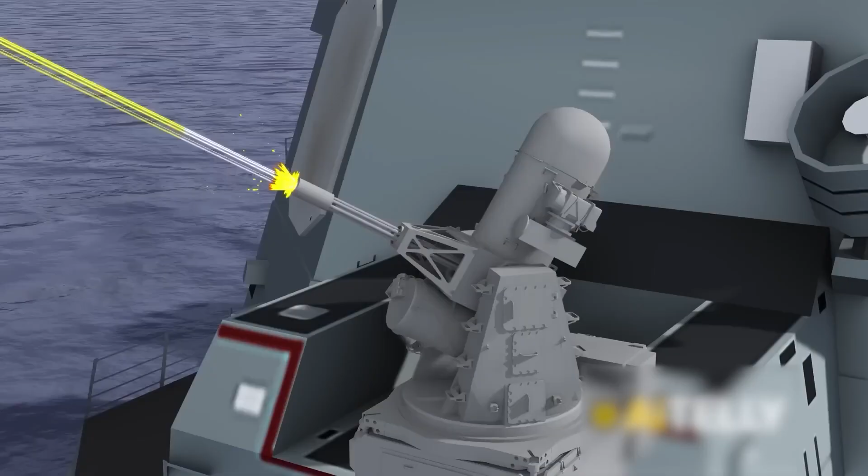The United States has outfitted its ships with the most lethal armaments in the world. What are these weapons' capabilities? Are they strong enough to defend these aircraft carriers against the expanding aerial threats? Watch us examine some of the most lethal U.S. Navy weapons.

The U.S. Navy's surface fleet consists of around 70 Arleigh Burke-class destroyers and 22 Ticonderoga-class cruisers, both equipped with the Aegis combat system. This modern system uses sophisticated radar and missile technologies to provide outstanding air defense, anti-submarine warfare, and ballistic missile defense. Furthermore, littoral combat ships provide flexibility and speed, particularly in coastal zones.

Another major aspect of the U.S. Navy is its submarine fleet, which comprises both fast attack and ballistic missile submarines. The Virginia-class SSNs are intended for stealth, reconnaissance, and strike capabilities, while the Ohio-class SSBNs play an important part in the U.S. nuclear deterrence policy.

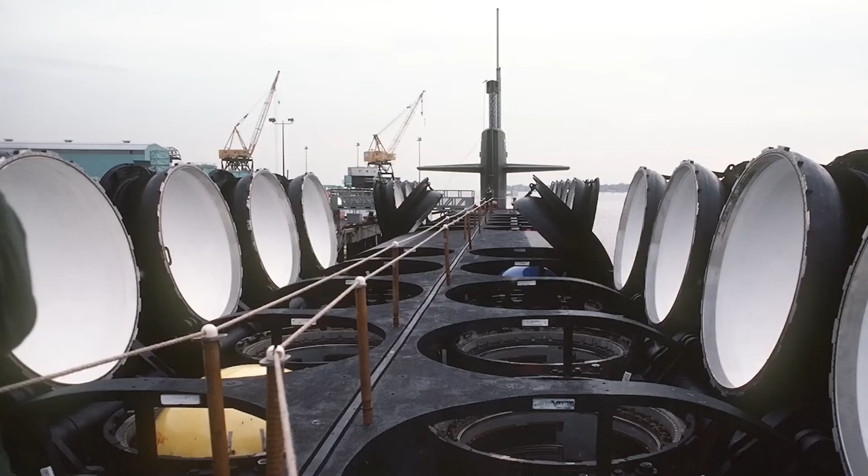Recently, modern battleships have faced major challenges from new technologies, such as drones and other stealth unmanned aircraft. On October 4, the USS Gerald R. Ford, the newest U.S. aircraft carrier, set sail for its first deployment amidst rising tensions in the Pacific and doubt about the future role of such massive ships in battle.

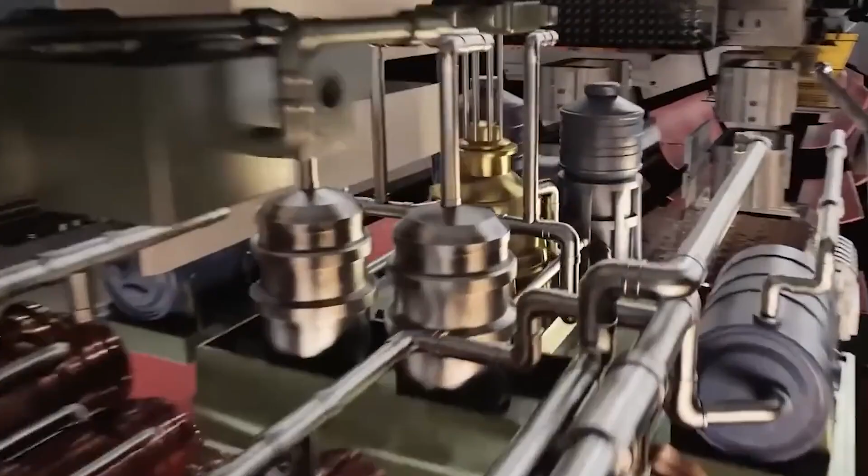Standing over 9 floors tall, the ship weighs 97,000 tons, 32,000 tons more than the heaviest battleships from WWII. The Ford is amazing in size. However, it is also fast, powered by modern A1B nuclear reactors that generate approximately 300 megawatts of power, making it nearly 3 times more powerful than contemporary supercarriers.

Despite their power, new Chinese anti-ship missiles capable of speeds greater than Mach 5 represent a huge threat to the Ford and the entire Pacific Navy fleet. These rockets might kill even the most modern ships. To combat these new threats, the Navy is using sophisticated long-range weaponry such as universal ship installations, railguns, and lasers, which may revolutionize future warfare.

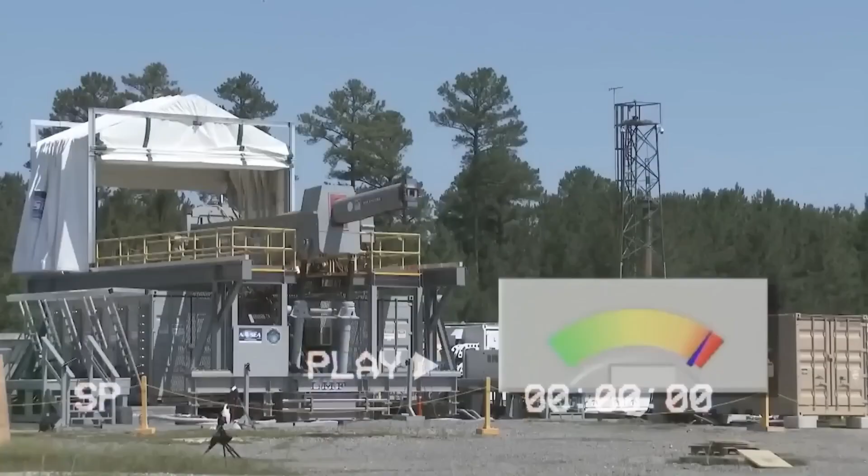Let's examine some of the technology that could safeguard these costly and crucial ships from aerial threats. Let's start with a unique firearm, the OTO Melara 76. This 76mm gun, also known as the OTO Melara 76/62 gun mount, is a naval autocannon manufactured by Italian manufacturer OTO Melara.

This gun is tiny enough to fit on a smaller vessel. It has a high firing rate and can use a variety of ammunition, making it ideal for close-range defense against missiles, aircraft, surface targets, and ground support. The ammunition comprises armor-piercing, incendiary, and guided rounds intended to hit moving anti-ship missiles.

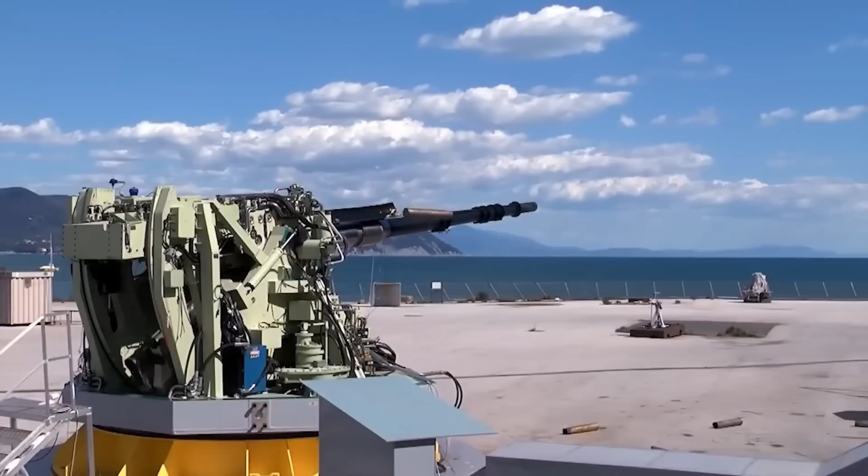It can also be concealed in a stealthy dome. The OTO Melara 76 gun's capacity to execute many duties such as short-range anti-missile defense, anti-aircraft operations, and ground support is one of its most notable attributes. The gun's rapid rate of fire, paired with a wide range of available ammunition, makes it more effective in a variety of combat circumstances. The cooling system of this gun uses seawater, while fresh water is used for flushing.

The gun's electrical power supply consists of a 440-voltage, 3-phase, 60 Hz main circuit and a 115 voltage, 1-phase, 400 Hz servo and synchro network. This electrical arrangement ensures that the gun functions properly under a variety of scenarios.

The OTO Melara 76mm cannon comes in a variety of configurations, each tailored to specific operating needs. The original compact model had a circular dome with a firing rate of 85 rounds per minute. The super rapid version was released in the early 1980s, featuring a diagonal dome as well as a substantially faster fire rate of 120 rounds per minute thanks to an upgraded feed system.

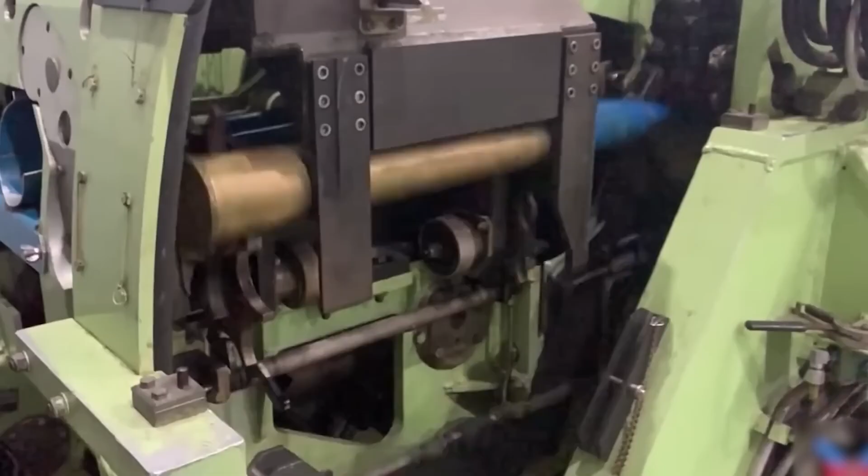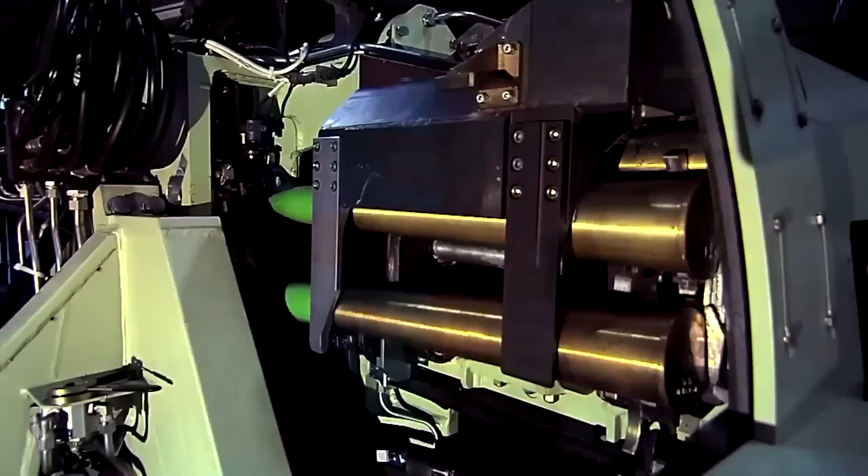The super rapid variant's increased rate of fire makes it particularly effective in high-pressure combat scenarios. The Strales system is another significant upgrade to the OTO Melara 76mm cannon. The Italian Navy prefers this type because of its improved anti-missile defense capabilities, especially when equipped with DART ammo, which allows it to counter multiple subsonic missiles at ranges of up to 8,000 meters. This medium-caliber piece is also effective against surface targets, demonstrating its versatility on the field.

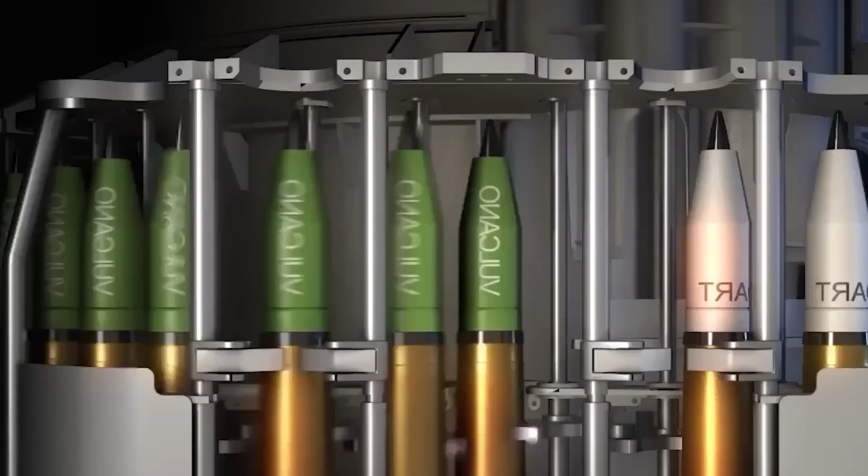Another novel invention is the 76/62 Sovraponte, a new compact and lightweight mount for the 76/62 gun. This system weighs roughly 30 to 40% less than the normal Super Rapid and may be installed without entering the deck below. It holds 76 ready-to-fire rounds and is available for purchase with or without the Strales system. The Sovraponte mount was first deployed on the Italian Navy's Thaon di Revel-class patrol vessel, above the helicopter hangar, emphasizing the gun's adaptability through its small form.

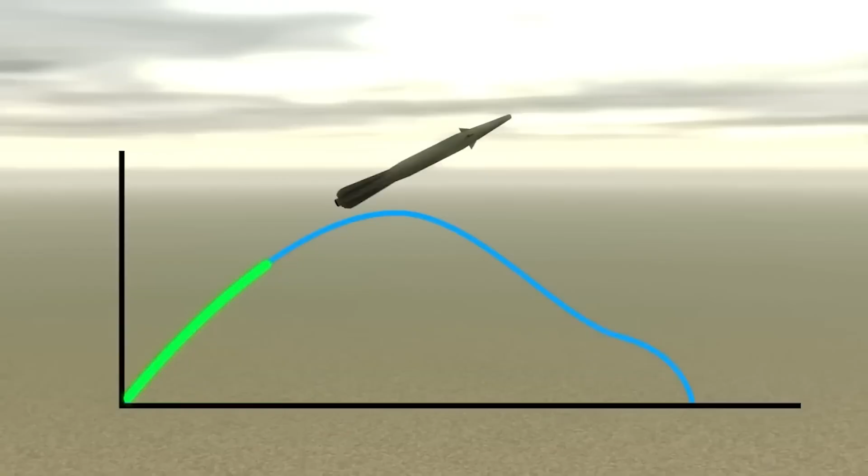OTO Melara offers a diverse assortment of customized ammunition appropriate for a variety of combat roles. The available varieties include high-explosive standard rounds weighing 6.296 kg and with a range of 16 kilometers. Other ammunition types include multi-role munition, anti-missile projectiles with proximity fuses and tungsten balls for fragmentation, and semi-armor-piercing SAPOM rounds with a 16-kilometer range. The guided DART projectile is intended for engaging moving airborne and missile targets, whereas the Vulcano guided projectile, weighing 5 kilos, has a range of around 40 kilometers.

The fire control systems of the OTO Melara 76mm cannon have also improved significantly over time. Early versions, such as the compact variant, used the RTN-10X Orion radar. Later, in the early 1980s, the more sophisticated RTN-30X radar was introduced. This new system can handle a variety of calibers, including 40, 76, and 127 millimeters, as well as missiles such as the Sea Sparrow and Aspide. The RTN-30X system first saw duty with the Italian Navy on the Garibaldi cruiser, and it has since been installed on a number of destroyers and frigates.

The OTO Melara 76mm gun is a versatile and widely used naval autocannon that has evolved significantly since its introduction. The gun remains an important weapon for modern naval forces, with several types available, including the compact, Super Rapid and Sovraponte, as well as a wide selection of ammunition and superior fire control systems. Its flexibility to perform numerous functions, along with unique design features, guarantees that it will continue to play an important role in naval operations for many years to come.

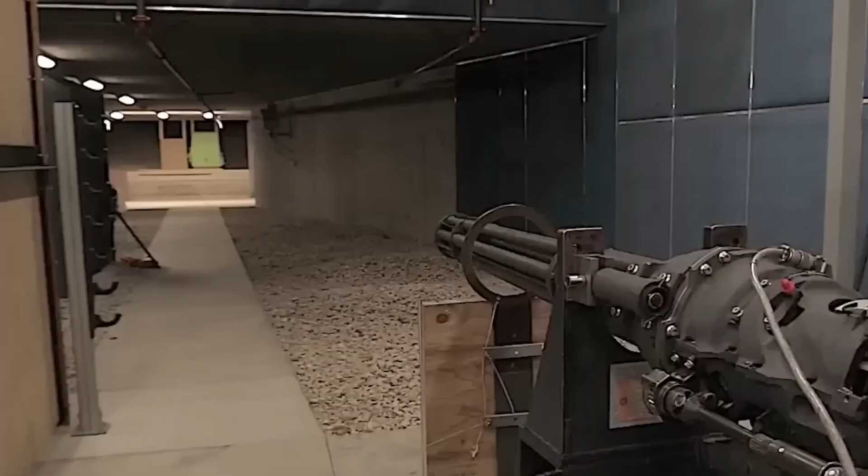Another weapon is the Phalanx CIWS. It's an automatic gun system designed to protect military ships. General Dynamics, now part of Raytheon, built it to protect against threats like airplanes, missiles, and small boats. The system includes a radar-guided 20mm Vulcan cannon that can swivel to target approaching threats. The Phalanx is utilized by the United States Navy and 15 other countries, and it is installed on practically all U.S. surface combat ships except the Zumwalt-class destroyer and the San Antonio-class amphibious transport dock.

Other users include the British Royal Navy, the Royal Australian Navy, Royal New Zealand Navy, Royal Canadian Navy, and United States Coast Guard. The Land Phalanx Weapon System, LPWS, was developed as part of the counter-rocket, artillery, and mortar system. It was employed to defend against rocket, artillery, and mortar attacks as the United States prepared to leave Afghanistan in 2021. The U.S. Navy also uses the SeaRAM technology. This combines the RIM-116 Rolling Airframe Missile with sensors similar to those found on the Phalanx. It was designed as a last line of defense against approaching threats such as anti-ship missiles, aircraft, and small boats.

The U.S. Navy tested the first prototype on the destroyer leader USS King in 1973, following which adjustments were made to increase performance and dependability. In 1977, the Phalanx operational suitability model was successfully tested on the destroyer USS Bigelow. This model completed all maintenance and reliability requirements, resulting in its production certification in 1978. The first orders were 23 for the U.S. Navy and 14 for foreign military sales. The aircraft carrier USS Coral Sea was the first fully equipped ship in 1980. The Navy also began putting CIW systems aboard non-combatant warships in 1984.

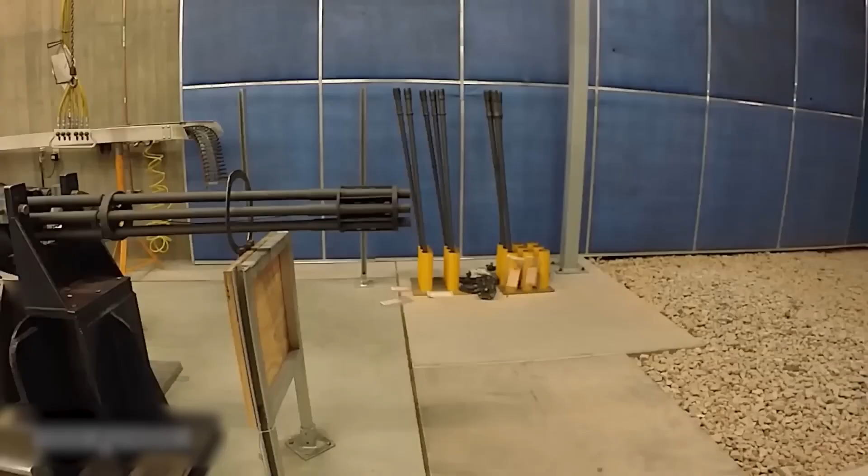The Phalanx system is based on the 20mm M61 Vulcan rotary cannon, which the United States military has utilized on various aircraft since 1959. It uses a Ku-band fire control radar system to locate and track targets. The device is positioned on a platform that can quickly move up and down, as well as side to side, to track incoming threats. This device includes both the gun and the automated fire control system.

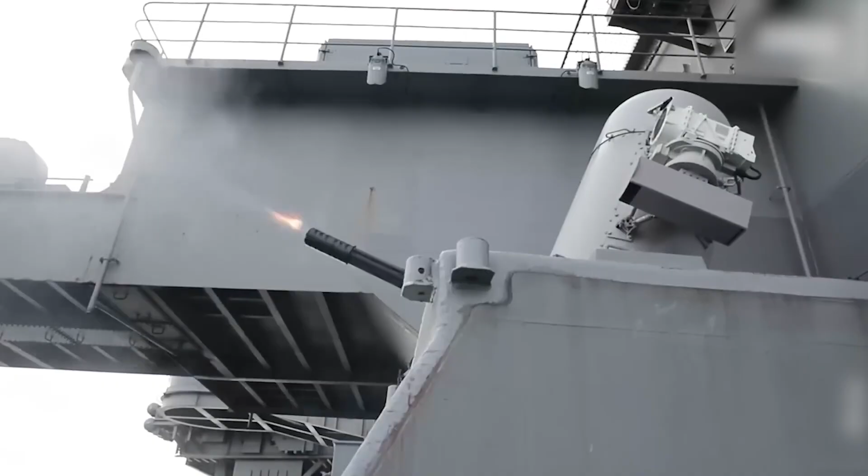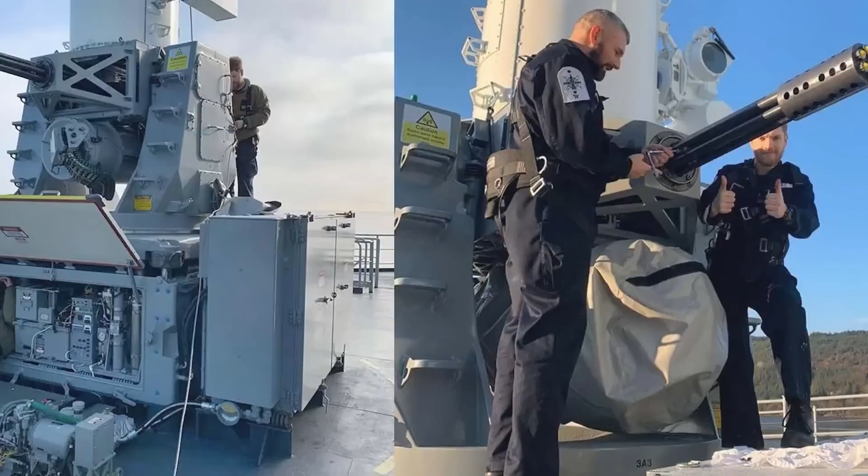Other major components enable it to automatically search for, detect, track, and engage targets using its computer-controlled radar. Its self-contained architecture makes it ideal for support ships, which typically lack advanced targeting systems and have limited sensors. Phalanx CIWS units are frequently dubbed R2-D2 due to their round radar form and automated function, which resembles the droid from the Star Wars films.

In April 2017, Raytheon tested a new electric cannon for the Phalanx, which can fire at varying rates to save ammunition. This innovative design replaces the pneumatic motor, compressor, and storage tanks, reducing the system's weight by 180 pounds while increasing reliability and saving operating expenses.

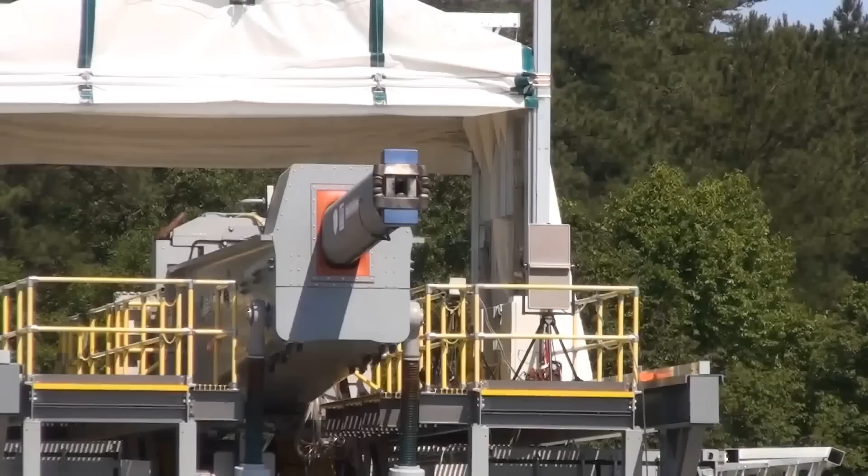The United States has also invested in cutting-edge weapons to make its aircraft carriers more formidable. Some of this weaponry includes railguns and laser weapons. People often refer to a railgun as a rail cannon. This weapon utilizes electromagnetic force to propel projectiles at high speeds. Unlike traditional weaponry, projectiles do not usually contain explosives. Instead, they exploit their enormous kinetic energy to produce damage.

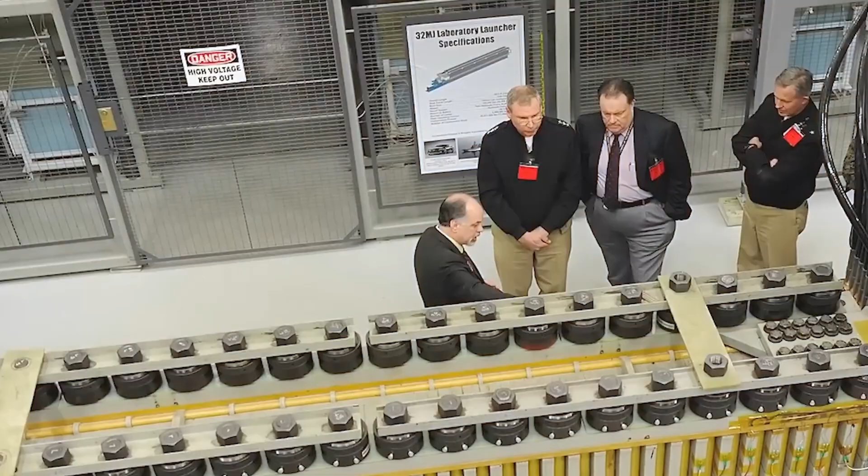A railgun consists of two parallel metal tracks that employ an electrical current to accelerate a sliding piece between them. This is comparable to how a homopolar motor operates. As of 2020, research has centered on employing railguns as weapons. They have the ability to shoot projectiles at considerably faster speeds than traditional weapons. Traditional guns can normally fire projectiles at rates of up to 2 kilometers per second. However, railguns can easily exceed 3 kilometers per second.

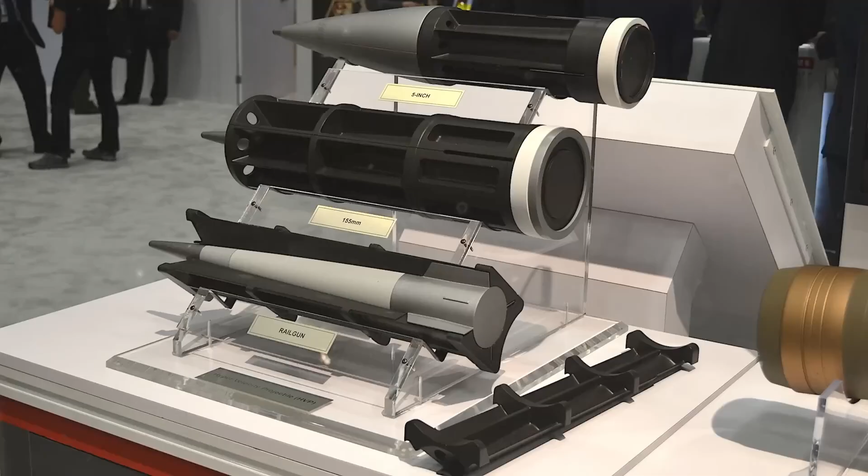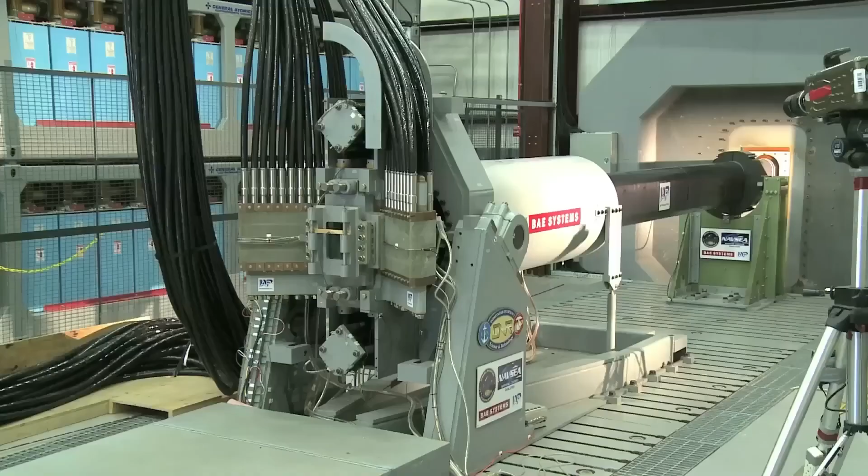This increased speed can offer railgun projectiles a longer range and greater destructive power, depending on their kinetic energy when they strike a target. Railguns do not require explosive propellants, hence, the projectiles are less expensive and safer to handle. However, research on railguns is currently primarily focused on this area. Despite many years of development, it is unclear whether they will become useful military weapons very soon.

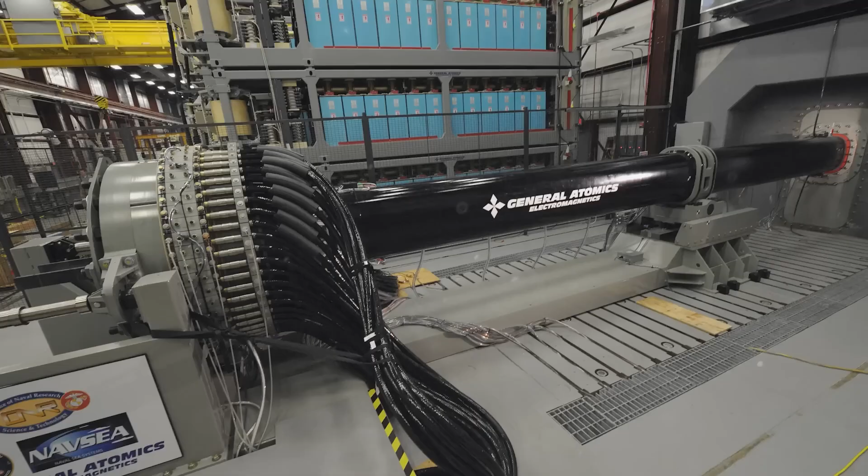Any comparison between electromagnetic propulsion systems and standard chemical propellants must take into account aspects such as durability, availability, cost, and the complexity of the power sources required by electromagnetic launchers. How do these railguns operate? The name railgun comes from the fact that it has two parallel metal tracks. The gun's back end is formed by connecting one end of the rails to an electrical power supply. A conductive bullet placed between the rails completes the circuit.

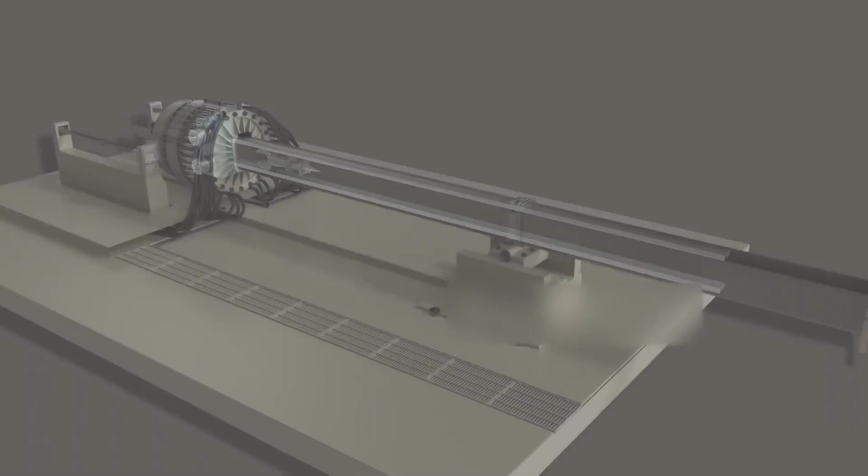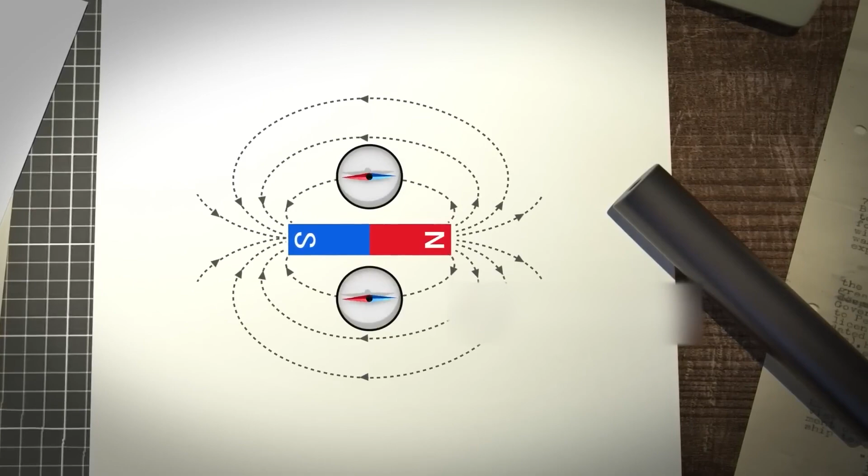This lets electrons go from the power supply to the projectile via one rail, then back down the other rail to the power supply. This electrical current causes the railgun to behave as an electromagnet, generating a magnetic field between the rails. According to the right-hand rule, the magnetic field flows around each rail. Because the electric current runs in opposite directions along the rails, the overall magnetic field between them propels the projectile forward along the rails toward the front end of the cannon. While forces attempt to push the rails apart, they are kept firmly in place and do not move.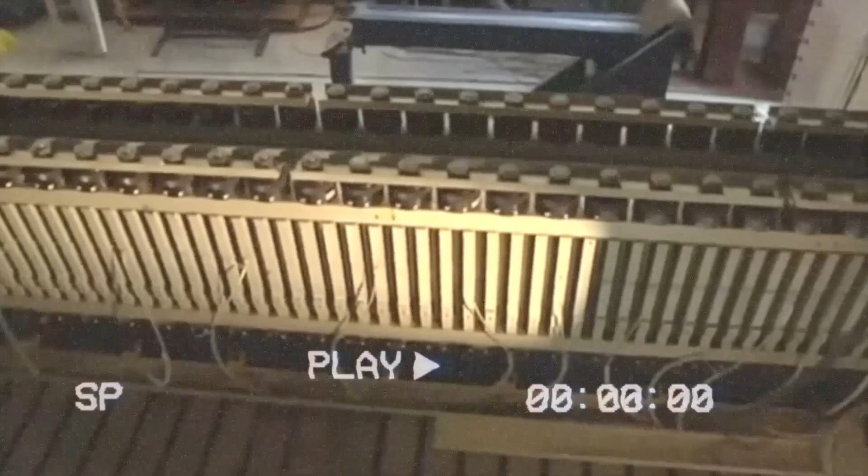If a current of 1 amp travels through two long parallel wires 1 meter apart, the force on each wire is 0.2 micronewtons. In general, force grows as the square of the current. It diminishes as the distance between the wires increases. Railguns that discharge projectiles weighing a few kilograms and have barrels a few meters long require extremely high currents to reach speeds of roughly 1,000 meters per second. A massive power supply capable of producing approximately 1 million amps of current can provide a powerful force that propels the projectile at speeds of several kilometers per second.

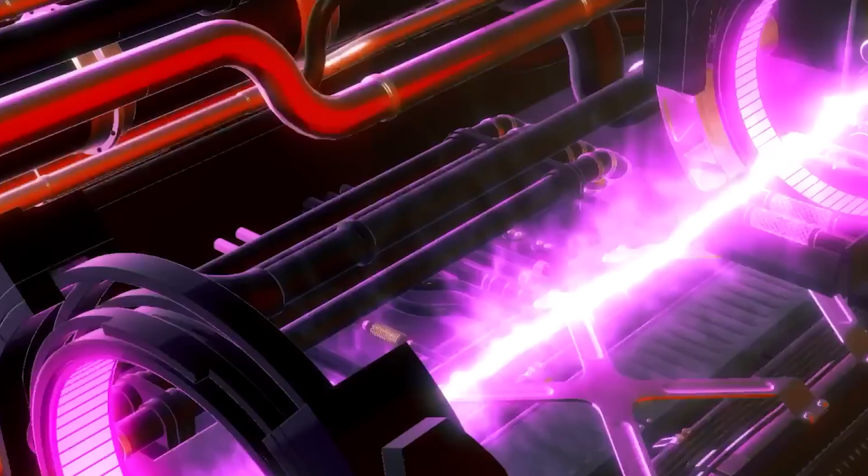However, these high speeds produce a lot of heat, which can quickly wear down the rails. Rail weapons would require frequent rail replacement or the use of special heat-resistant materials. Experts concur that major advancements in material science are required to build powerful railguns capable of firing multiple times before requiring new rails.

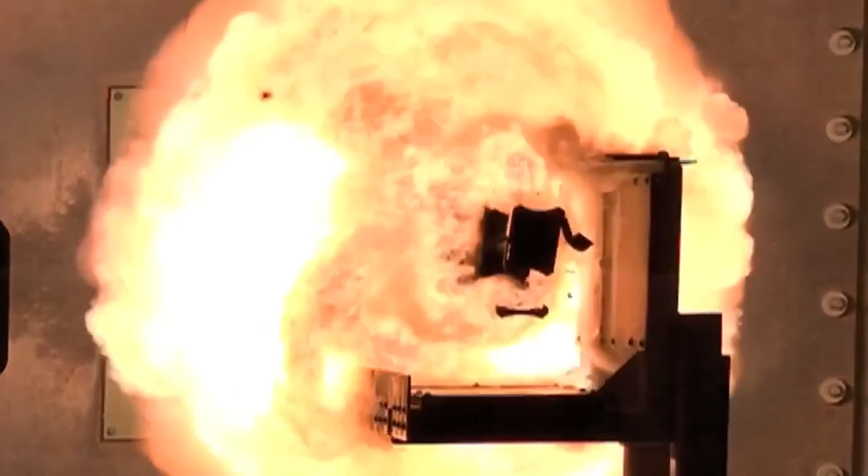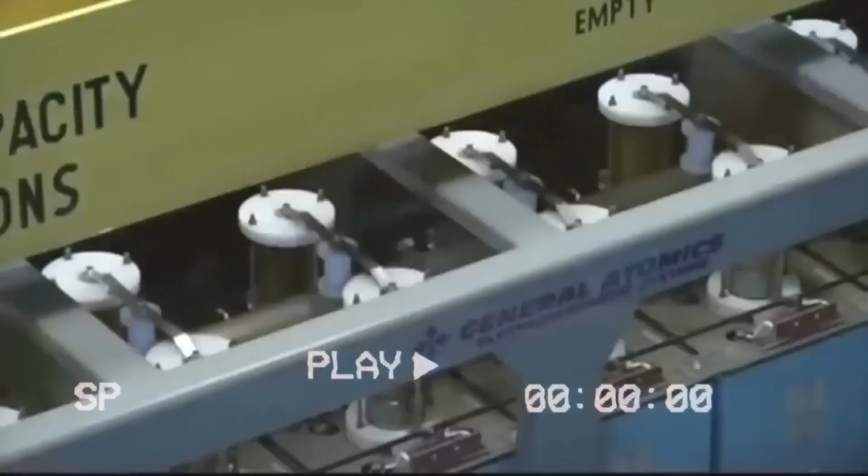The barrel must sustain this pressure for numerous rounds before breaking down. The power supply must deliver big currents in a consistent and safe manner for an extended period. The most crucial indicator of a power supply's performance is the amount of energy it can provide. As of December 2010, the maximum energy required to fire a railgun bullet was 33 megajoules.

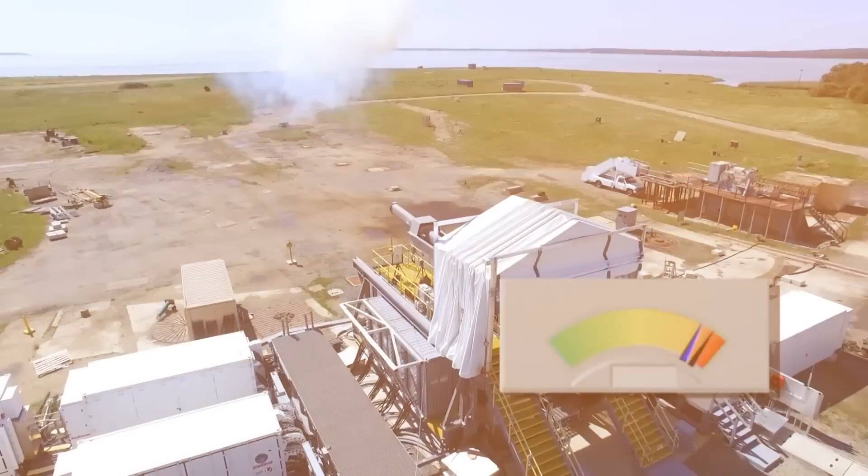Railgun power supplies commonly use capacitors and compulsators, which charge slowly from other energy sources. The rails must withstand high forces during firing, which can cause them to separate from the projectile. If the distance between the rails and the projectile widens, electrical arcs can form, damaging the rail surfaces. This limited early railguns to a single shot at a time.

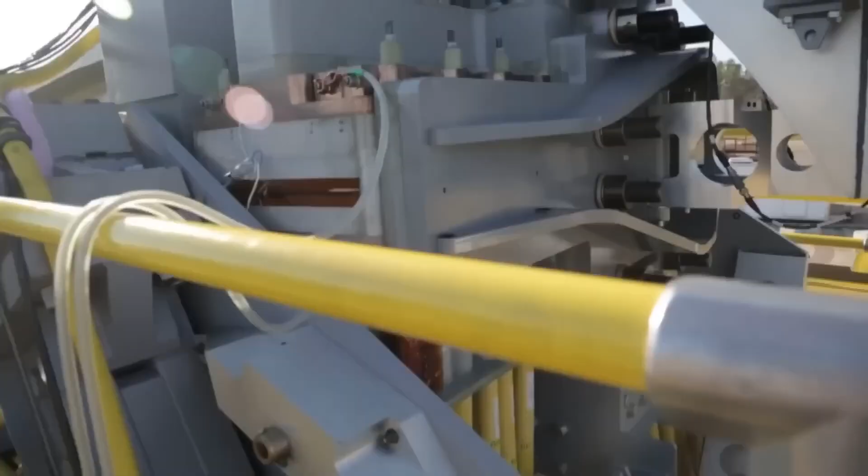A railgun's efficiency is additionally restricted by the rail's inductance and resistance, as well as its power source. Different rail shapes and designs are being tested mostly by the US Navy and other research organizations. The rails and projectiles must be built of highly conductive materials that can endure the stresses of firing.

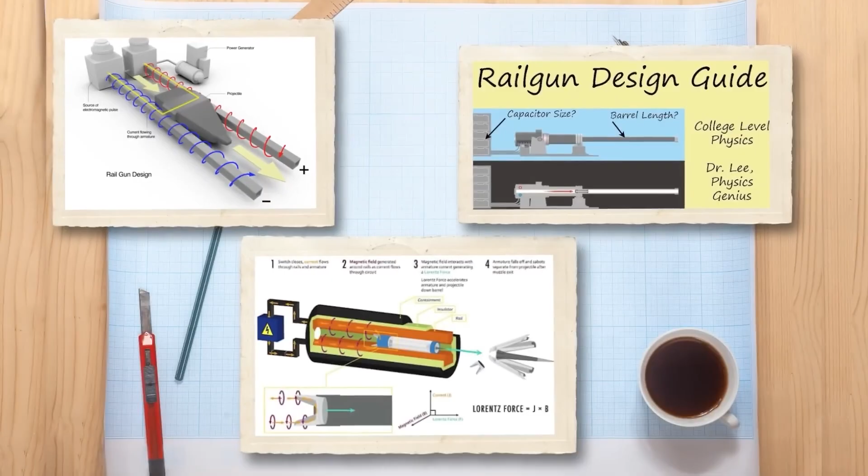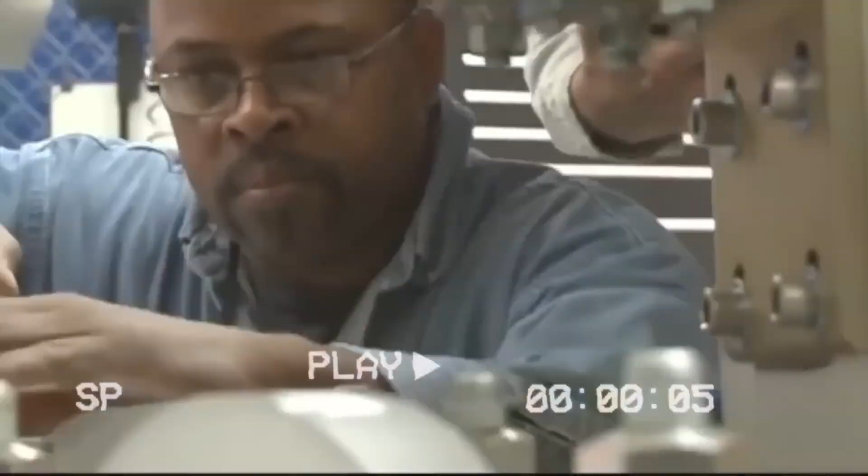Some studies falsely stated that the recoil force of railguns could be diverted. However, detailed research reveals that recoil acts on the breech closing in the same way as it does in traditional weapons. As with the projectile, the rails repel each other due to a sideways force from the magnetic field. They must be securely mounted to prevent bending. Major advances in material science are required before rails can be developed that allow railguns to fire more than a few full-power bullets before needing to be replaced.

Railguns generate a lot of heat as electricity flows through the rails. The friction is created as the missile exits. This leads to three primary problems: the melting of parts, potential safety risks for personnel, and the enhanced heat signature that can be identified by hostile forces.

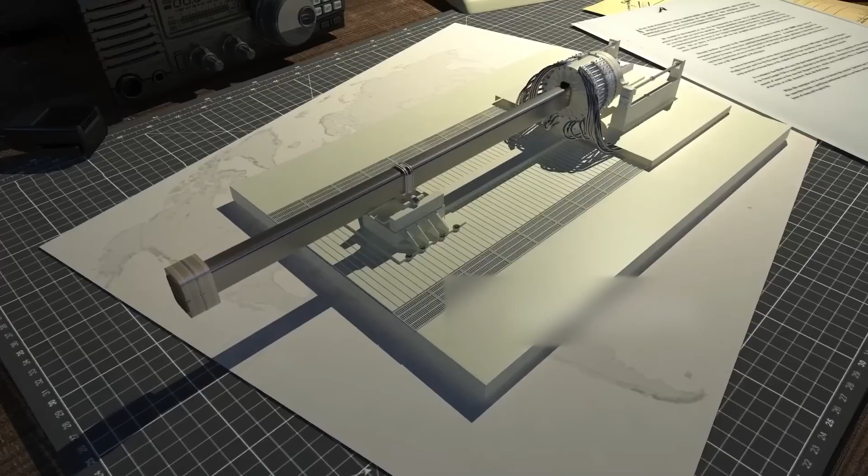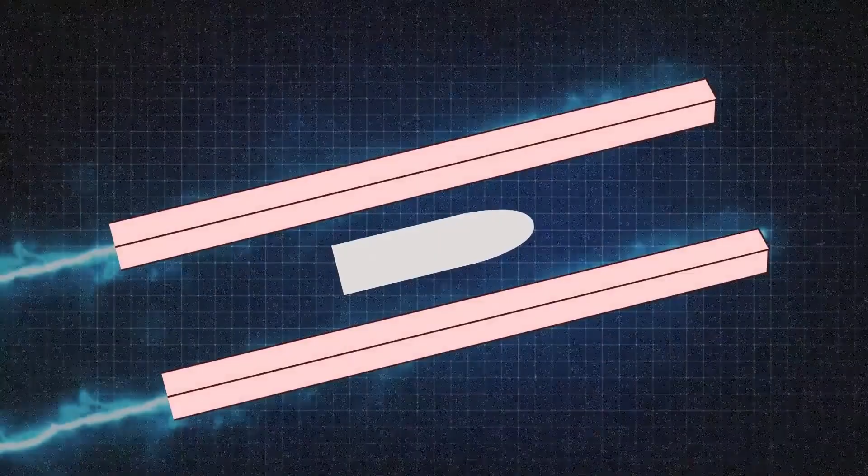To fire such a gadget, severe heat-resistant materials are required. If not, the rails and other equipment may melt or get damaged. Most railgun designs erode the rails with each shot. Projectiles may also wear out, drastically reducing the lifespan of the railgun.

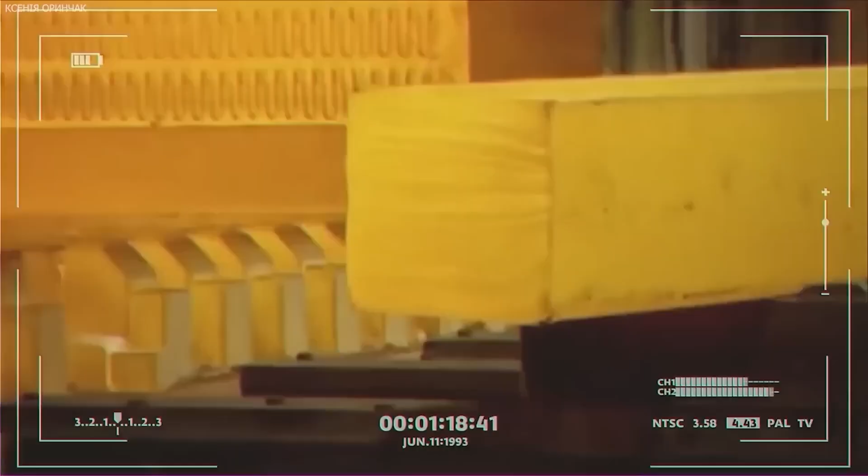While railgun technology is still being researched, the United States has made significant advances in laser system development. Let's look at the features and capabilities of the US Navy's High-Energy Laser Counter Anti-Ship Cruise Missile, or HELCAP, project, which is moving closer to turning its developed technology into an operational system.

Currently, there is one San Antonio-class amphibious transport ship. It comes armed with a 150 kilowatt Mark 2 Mod 0 laser weapon system demonstrator. Furthermore, 8 Arleigh Burke-class destroyers are equipped with the Optical Dazzling Interdictor, Navy, and one destroyer boasts a 60 kilowatt high-energy laser with an integrated optical dazzler and surveillance, or HELIOS, system.

HELCAP is not like these devices, which are intended for counterintelligence, surveillance, and reconnaissance by blinding or killing unmanned aerial vehicles. HELCAP primarily targets anti-ship cruise missiles in a crossing situation, allowing it to protect against missiles fired at surrounding friendly ships. After completing Phase 1 of the ruggedized high-energy laser, the US Navy launched HELCAP in 2019.

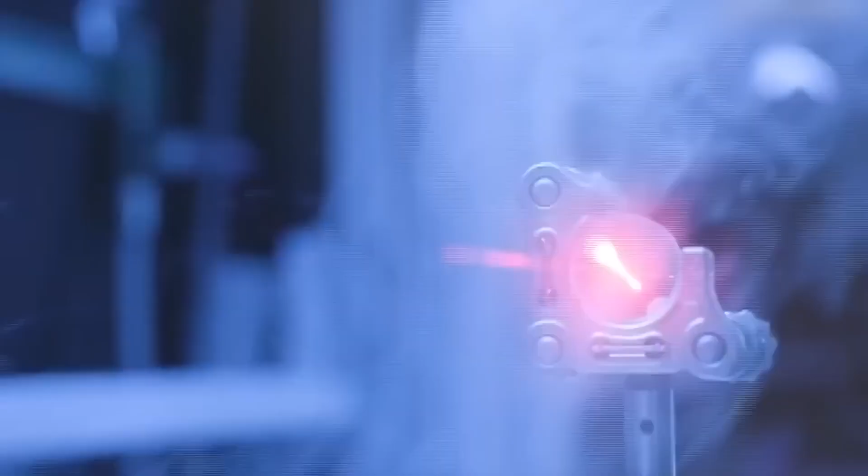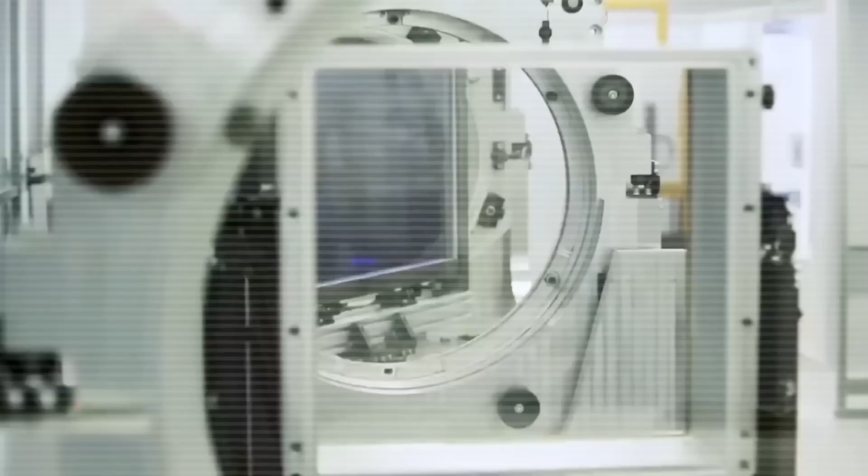HELCAP attempts to overcome technological challenges associated with laser weapons, such as enhanced beam control, atmospheric turbulence effects, precise tracking in cluttered situations, and autonomous target identification and aiming. HELCAP's results and years of technological progress will combine to form the laser weapon testbed. This testbed will employ a 300-plus kilowatt laser produced under the High Energy Laser Scaling Initiative, which has financed teams to provide increasingly strong lasers.

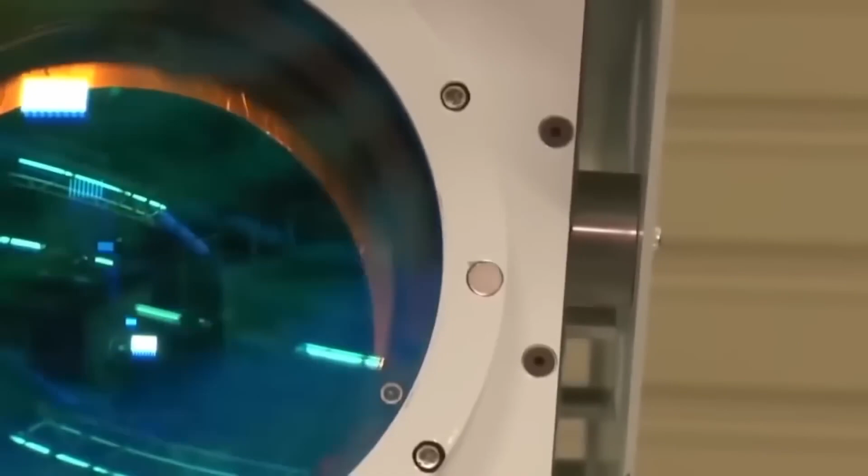The laser will be coupled with a Navy-developed prototype beam control system, as well as a power and cooling system. The LWT will be tested at the White Sands Missile Range this year. The initial tests will concentrate on the system's beam control, tracking, and optics performance. After that, it will be tested against increasingly complicated targets, beginning with fixed ground targets, progressing to moving targets, and finally low-cost unmanned aerial targets and cruise missile surrogates.

Once finished, this initiative will contribute to the improvement of future systems based on the Surface Navy Laser Weapon System Increment 1. The program currently has no plans to leave any assets or prototypes for ship integration.